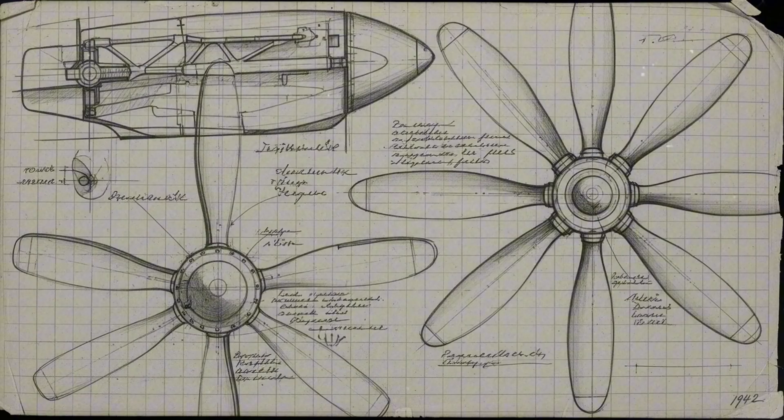full of credentialed experts, drop a new geometry on the table, and force them to confront the possibility they have been wrong this whole time.

This is how a nation becomes unstoppable, not through arrogance, but through the brutal willingness to break its own assumptions faster than the enemy can break theirs.

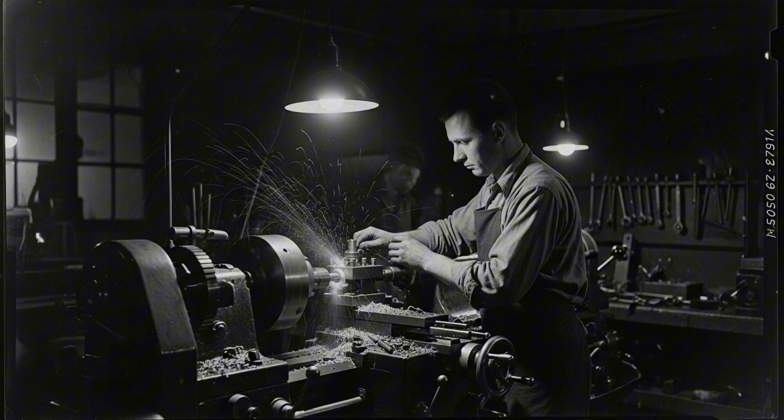In a few months, ideas like Rusty's will be crossing the Atlantic, traded in technical packets between US and UK labs. In a year, the British will bolt monstrous Griffon engines onto Spitfires and start thinking about the unthinkable.

Can a piston fighter touch 470 miles per hour? That hypothetical only exists because of nights like this.

One man. One failed idea. One moment of not surrendering to mockery.

Rusty Carter leans back in his chair, exhausted, his eyes red, his pencil nearly broken. He has no idea if any colonel, any procurement board, any airplane manufacturer will ever greenlight this. But tonight is not about approval.

Tonight is about the truth hidden in the numbers. America wins wars with ideas. And sometimes the idea is born at 1:37 a.m. on a freezing November night in Ohio, drawn by a man nobody will ever remember, sitting alone in a machine shop, refusing to give up.

To understand why this night matters, you have to understand where Rusty is standing in the timeline of the world. 1942 is the year the United States stops being a country and becomes a factory. This is not poetic. It is literal. Every hour, every day, every week, the nation converts its entire peacetime bloodstream into industrial throughput.

Government people call it mobilization. But the men inside it don't use that word. They call it work. They clock into it. They bleed into it. Ohio is one of the primary hearts of this machine.

People on the coast think innovation means MIT lecture halls or California eccentric garage inventors. But in 1942, the most important intellectual property in America is not on the coasts. It is in the Midwest, inside shops that smell like coolant, kerosene, hydraulic fluid, and wet steel. This is where the tooling for aviation lives. This is where the cutting tolerances for the future are forged. This is where the United States is quietly building the capability to scale any idea that works into tens of thousands. Rusty lives inside the real America of 1942.

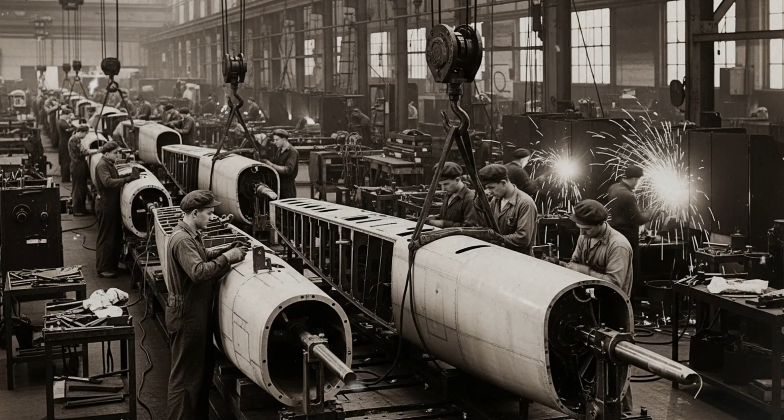But Rusty's father had a habit of bringing home broken things from the shop. Cracked housings, damaged fixtures, bent spindles. And Rusty learned early that there is no such thing as scrap. There are only parts that are waiting for the right mind to see a path back to usefulness. That is his psychological operating system. Everything can be saved if you look at it the right way.

He never went to university. He went to the tools. His original plan was to be a mill operator. He wanted the feeling of steel under feet. He wanted the feedback loop of tool chatter and sound pitch and surface finish telling you if you are doing it right. But machining is a gateway drug.

One year you are cutting aluminum webs for somebody else's drawings. Two years later you understand the drawings. Four years later you start drawing your own. The lines on the paper are just the shadows of the cuts you intend to make.

While other men collect cigars or guns, Rusty collects failed ideas. He clips diagrams from magazines of wild French pushers, of weird British tractor hybrids, of Italian counter-rotated coaxial floatplane prototypes. He files them. He studies them. He studies the failures as if they are sacred scripture. He is not trying to be first. He is trying to be the guy who understands why everyone else failed so he does not step into the exact same traps. He has a defect.

The kind that looks like a moral failure to the small-minded. He gets obsessed. He walks into the shop after midnight even when he is not on shift. He burns lamp hours like other men burn cigarettes. He will ruin a weekend because he cannot stop thinking about a blade-tip vortex he saw in his peripheral imagination. At his worst moments he is almost possessed. But the possession is not random. It is disciplined. It is directed. And it is always toward the promise of extracting more power from the same cubic inch of displacement.

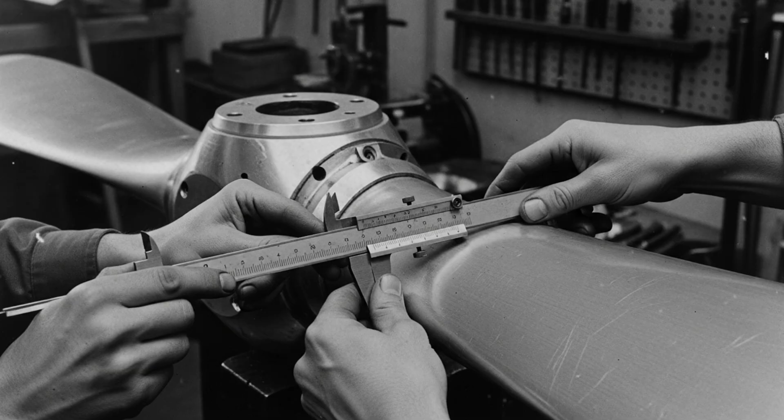Every extra horsepower after a certain threshold becomes heat and swirl and drag. You can raise the power plant curve another 50 horsepower on the dyno and the airplane barely goes any faster. This is the place where the war becomes a mathematics of diminishing return.

The British already feel the edges of this trap. They have the Spitfire, the most beautiful aerodynamic sculpture of the Allied world. And they know the shape has more speed left in it. The airframe can take more. The wing still has more to give. The structure can carry more load and maintain coherence in high-energy dive and pull-out.

But the bottleneck is not the wing, not the cooling pack, not the pilot. It is the propeller disc. It is the invisible black circle in front of the airplane that decides how much of that combustion becomes acceleration versus how much becomes empty air vibration.

The Germans have a solution. They pour their energy into direct injection and exotic supercharger topology. They push the envelope through the engine itself. But the Allies are fighting a different war. We need throughput, we need quantity, we need reliability, we need a system that can be industrialized. This is where Rusty's problem becomes the Allies' problem, and the Allies' problem becomes Rusty's problem.

He knows the theory. He knows why side-by-side twin props failed. The interference field is horrific. The wakes collide and amplify drag. The blade tip vortices become pathological. The entire energy transfer becomes turbulent trash.

Side-by-side is a graveyard. But coaxial is different. Contra-rotation cancels torque. Contra-rotation neutralizes precession. Contra-rotation lets you reclaim bite at higher power density.

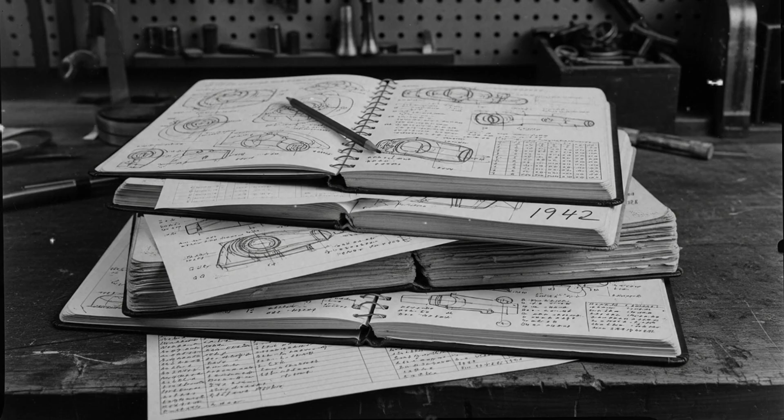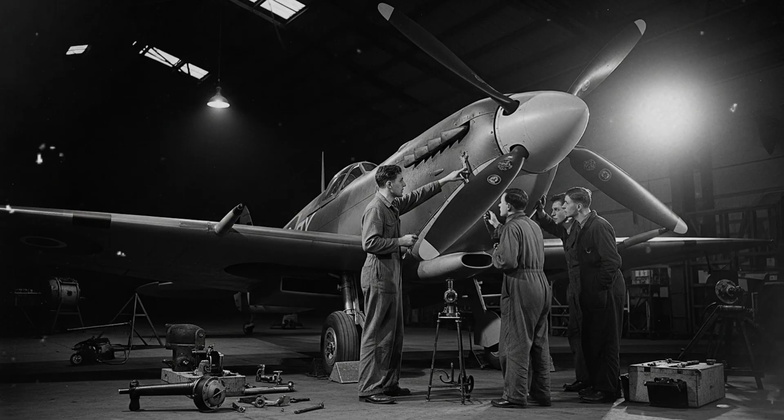There is a second deeper problem beneath all this. Rusty is American, and Americans are not supposed to have opinions about Spitfires. Diplomatically, the US and Britain are allies. Industrial reality, they are competitors. America is trying to prove that American mass production systems are superior. Britain is trying to prove that the old world still has the artistic touch, the taste, the cultural sophistication, to produce aerospace beauty that the new world still lacks.

If you are an American Midwestern engineer in 1942, saying out loud that you might have a way to make the British Spitfire faster, is like telling the world you think you can repaint the Mona Lisa. Who do you think you are? That is the emotional wall Rusty is smashing against. He does not have political permission.

He does not have institutional permission. He does not have cultural permission. He is trying to solve a problem nobody asked him to solve. He is trying to push an idea into an airplane that is not even his country's airframe.

But here is where America is unique. He doesn't need permission. In America, solutions are allowed to become arguments. Arguments are allowed to become prototypes. Prototypes are allowed to pressure the world. If the idea works, the idea will find a path. That is the most American principle on earth. The idea decides the path, not the hierarchy.

Tonight, Rusty is not trying to draw a propeller. He is trying to escape the prison of consensus. He is trying to rescue the free world from the horsepower wall. He is trying to prove that an American outlier working on the night shift in Ohio can bend the aerodynamics of the British crown jewel and push it into a performance domain nobody had words for yet.

470 miles per hour in level flight. That number is not madness. That number is the hidden truth waiting behind the problem if the double disc becomes more than a joke.

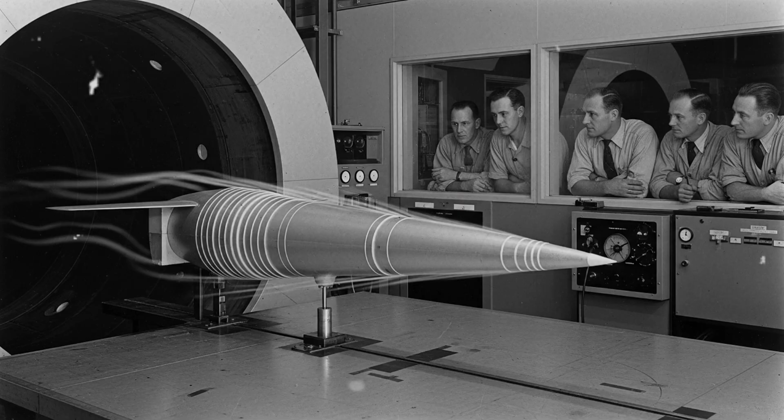Ohio, November 1942. The snow hasn't fallen yet, but the chill has crept inside every corner of the small machine shop north of Dayton. Outside, the streets are quiet, almost peaceful, but inside the shop, one man refuses to rest. Rusty Carter sits hunched over a drafting table, a single flickering bulb above him casting shadows on scattered sheets of graph paper. The silence is absolute, except for the scratch of his pencil against the page.

Rusty's idea is simple and yet insane. Two propellers, side by side. Twin discs spinning independently. Everyone calls it stupid. Engineers in Dayton's big factories have laughed at it. Aerodynamicists in Cleveland have rolled their eyes. The men in his own shop have called it impossible.

And yet, Rusty believes, not because he has a degree or a title but because he understands steel, airflow, and the stubborn behavior of spinning air, that this stupid configuration could be America's key to pushing piston-powered aircraft beyond what anyone thought physically possible. He redraws the discs again and again. Every line, every circle, every arc is scrutinized with the precision of a man who has no margin for error.

Every night, he repeats the calculations, refines the sketches, and questions assumptions the textbooks have been teaching for decades. Drag is a monster. Torque is a monster. Turbulence is a monster. Every problem is real. Every failure so far is a warning. But Rusty is driven by a singular conviction. The solution exists somewhere in the numbers, in the geometry, in the blades themselves.

And then something clicks. A pencil stroke. A simple decision. Stack the discs along a single axis instead of side by side. Spin them in opposite directions. Contra-rotation. Torque cancellation. Higher usable blade loading. The chaos of the first disc becomes fuel for the second. The problem is no longer a problem, it is raw material.

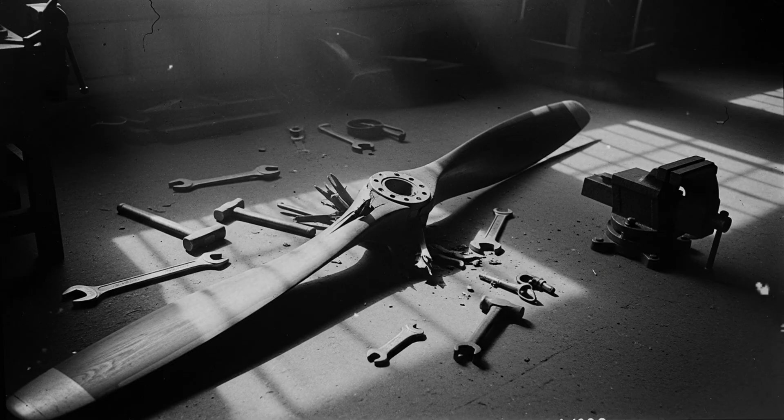The implications are enormous. In theory, this could allow any airframe, even something as iconic as the Spitfire, to extract full engine power without being punished by drag or torque. A 470 miles per hour piston fighter is suddenly within reach. Rusty doesn't know if it will work in practice, or if the British will even pay attention, but he sees it. He can see it in the numbers, in the curves, in the subtle interactions of the air and the metal.

Yet the greatest challenge is not technical. It is cultural. Rusty is an American Midwestern machinist, uncredentialed, unknown, and unproven. In Germany or Japan he would be invisible, ignored, or worse. In Britain he is just an outsider. In America he has the peculiar privilege of freedom. The freedom to fail, to try, to submit an idea without permission. It is this culture, this quietly radical aspect of American society in 1942, that allows him to take the impossible seriously.

Tonight, Rusty sits alone, exhausted, eyes bloodshot, pencil nearly worn to a stub. Outside, the wind carries the scent of snow and cold. Inside, the smell is oil, metal, and possibility. The world cannot yet see what he sees. The generals, the factory supervisors, the pilots, even the aeronautical theorists, they will dismiss this idea until the numbers force their attention.

And yet, Rusty's quiet determination is the kind of force that reshapes history. Because America does not win wars only with weapons. America wins wars with people like Rusty Carter. Stubborn, curious, unafraid to challenge authority, and willing to experiment in the face of ridicule. Tonight is the first night of the story that will eventually ripple across continents.

It is the night when an idea dismissed as stupid begins the transformation of air combat. The night when a machinist in Ohio whispers to himself, "If it works, use it," not knowing if anyone ever will. This is not a story of fame.

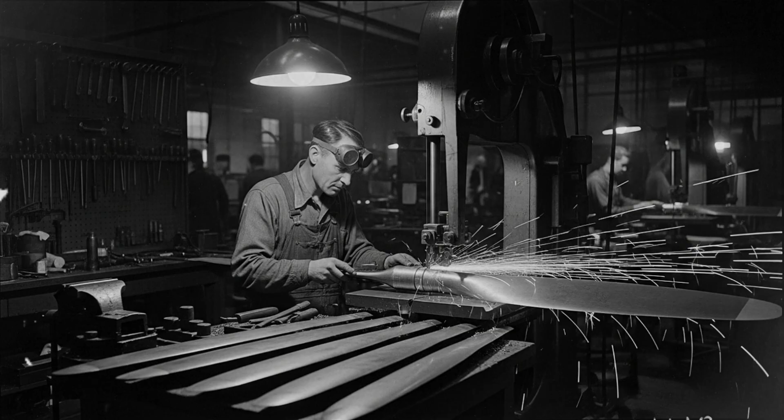about to enter the bloodstream of the Allied war effort, quietly bending the trajectory of history. Because America's secret weapon is never the engine, the wing, or even the airframe. It is the mind allowed to think freely, to fail boldly, and to persist relentlessly. And tonight, that mind belongs to one man, Russell "Rusty" Carter.

To understand why Russell Carter's lone night in Ohio matters, we have to see the world as it was in 1942. The United States had transformed virtually overnight from a peacetime nation into a colossal war machine. Factories that once produced washing machines and tractors now churned out bombers, fighters, engines, and propellers at an industrial pace unmatched anywhere on the planet.

Every small town with a machine shop, every Midwest workshop, every humble metal lathe was a critical node in the largest logistical and technological operation humanity had ever seen. Dayton, Ohio, was part of the beating heart of this network. Its streets were lined with small manufacturing facilities that fed into Wright Field and the larger aviation ecosystem of the Midwest.

Here, the language was not policy or politics. It was precise and it was technical. Men and women spoke in microns, torque, pitch, and feed rate. The conversation at the diner after midnight wasn't about victories or losses overseas. It was about tolerances, tool chatter, and the way a bevel could shave fractions of a second off assembly time.

This culture, obsessive, meticulous, relentless, is what allowed ideas to flourish in America in a way they could not anywhere else. Meanwhile, across the Atlantic, the British were facing their own aviation dilemma.

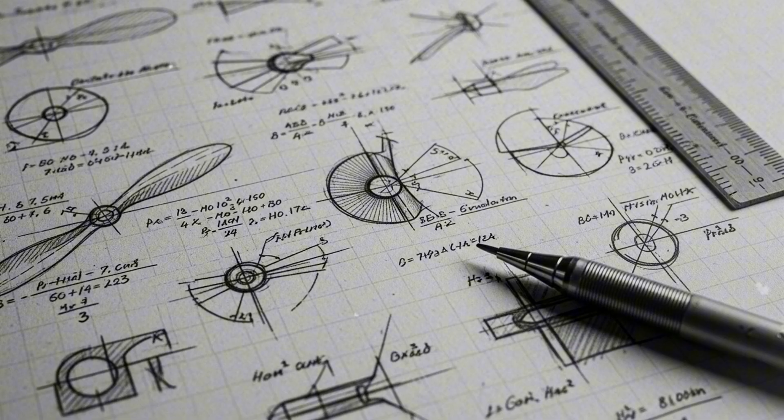This is why Carter's idea, born quietly in a Dayton workshop, had the potential to reshape the Spitfire. Not because he had the authority or fame, but because America allowed the experiment to exist at all. The idea could travel across the Atlantic through letters, technical papers, and sketches, reaching minds capable of interpreting and applying them. Within months, a British engineer in Farnborough could hold a sketch of Carter's coaxial contra-rotating design and glimpse a way to push a fighter beyond the speed limits that had seemed insurmountable.

And so, while the world was embroiled in global conflict, the real battle was also being waged in workshops like Carter's. The fight was over the limits of horsepower, torque, and aerodynamics.

The difference between success and failure was measured not in medals, but in persistence, insight, and the courage to pursue what others deemed impossible. In essence, 1942 America was not just a country at war. It was a living laboratory of industrial ingenuity. And Carter, a machinist by trade and an obsessive experimenter by nature, was positioned at the perfect confluence of talent, culture, and necessity to turn a dismissed idea into a transformative force.

The backdrop then is clear: a nation operating at unprecedented speed, a global conflict demanding breakthroughs, and a culture that prized experimentation over hierarchy. In that environment, the stupid twin-propeller idea was not just feasible. It was waiting for someone bold enough to pursue it, night after night, in silence, with nothing but pencil, paper, and an unrelenting belief that the numbers could be bent. And Rusty Carter was that someone.

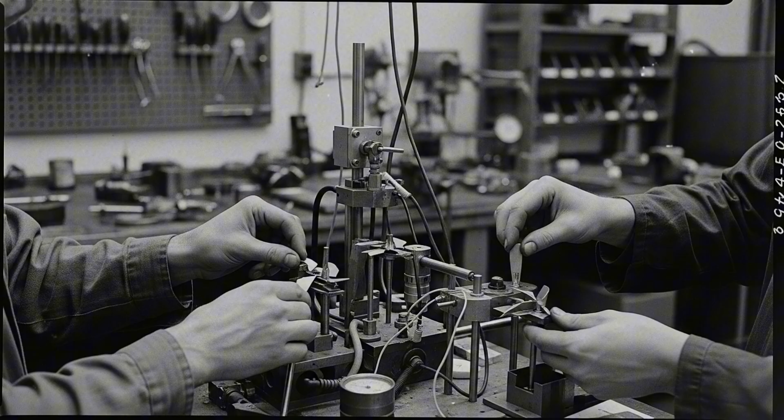Russell Rusty Carter is not a man who inspires awe the moment you meet him. He is not polished, not charismatic, not decorated. He is ordinary in every visible sense. Yet, beneath that ordinary exterior is an extraordinary mind, forged by years of hands-on work and a relentless curiosity that defies conventional training. Born in a modest Ohio home, Rusty grew up amid the clatter of foundries and the smell

of molten metal. His father worked long hours at a local steel plant, and his mother cleaned offices downtown. There were no libraries, no mentors, no elite institutions. But there were broken things, machines, tools, small devices left abandoned or discarded. Rusty learned early that nothing was truly useless. Everything could be salvaged, fixed, or repurposed. He internalized the lesson that persistence and observation could turn failure into insight.

He never attended university. His education came at the workbench, the lathe, and the drafting table. One year he was cutting aluminum webs. Two years reading blueprints. Four years designing parts. He learned to think like metal, how it bends, twists, and vibrates, and how the air interacts with it when spinning at thousands of revolutions per minute. To Rusty, the world was a series of problems waiting for hands and mind in concert to solve.

Rusty's obsession with failure is almost spiritual. He collects sketches, diagrams, and prototypes from magazines and engineering journals, not because he wants to copy them but because he wants to understand why they failed. He treats failure as sacred data, each discarded experiment a lesson etched in aluminum and ink. He studies vorticity diagrams, blade tip effects, and torque anomalies as if deciphering secret codes. To him, understanding the mistakes of others is more valuable than taking credit for successes.

His defect, or his gift depending on perspective, is obsession. Rusty works through nights, weekends, holidays. He burns lamp hours far beyond what the average man would consider reasonable. He follows mental threads that lead nowhere before snapping back to the solution. He will ruin sleep and social life for a single insight about airflow over a propeller blade. To outsiders he may appear fanatical. To himself he is merely faithful to the problem at hand.

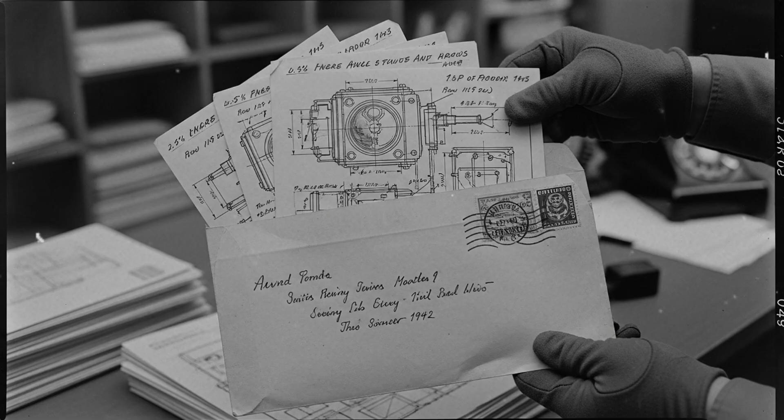Yet if it is valid, it will find a way forward. And Rusty Carter, working silently in Ohio, pencil in hand, eyes fixed on the spinning horizon of theoretical aerodynamics, is that principle made flesh. By the end of a single night, he will begin to sketch the coaxial contra-rotating propeller that, if applied correctly, could push a Spitfire into realms of speed previously considered impossible. Not through politics, not through rank, not through visibility, but through relentless faith in hands, numbers, and imagination.

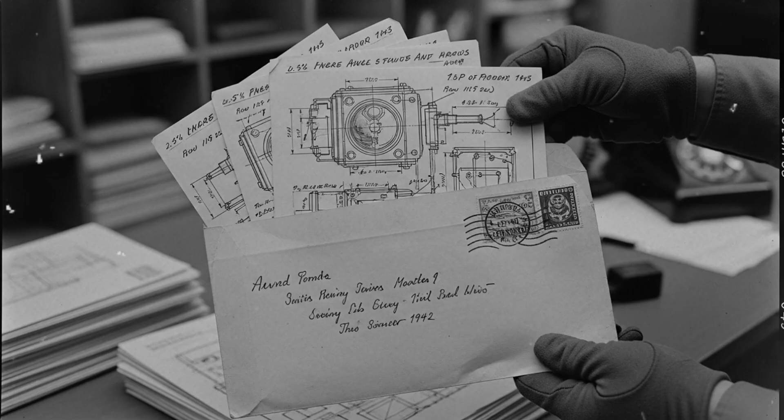By 1942, the Allied air effort faced a subtle but brutal enemy: physics itself. Engines were becoming more powerful, superchargers more efficient, fuel formulations more advanced. Yet each extra horsepower encountered a law of diminishing returns. The airframe could only translate so much energy into speed before drag, torque, and turbulence consumed the gains. This invisible ceiling frustrated engineers and pilots alike.

The Spitfire, Britain's crowning achievement, was agile, sleek, and fast. Yet it too approached the limits imposed not by design, but by the inefficiency of propeller technology. American engineers observed the same problem in their own aircraft. The Merlin and Allison engines could generate more power, but converting that energy into usable thrust remained the bottleneck.

Single, conventional propellers would hit a wall. The airflow stalls at high rotational speeds, tip vortices become destructive, and torque couples introduce uncontrollable tendencies in the airframe. Raising engine power alone could not overcome these fundamental aerodynamic limits. The problem was not in the engine, nor in the pilot, nor in the wing. It was in the disc, the invisible circle of blades at the front of the aircraft.

Contra-rotating propellers were known in theory, but the track record was messy. Side-by-side twin-prop configurations failed because the wakes collided, producing chaotic drag and reducing efficiency. Even small misalignments in phase or pitch could produce catastrophic torque effects. In short, the geometry seemed cursed. Every prototype brought destruction or disappointment.

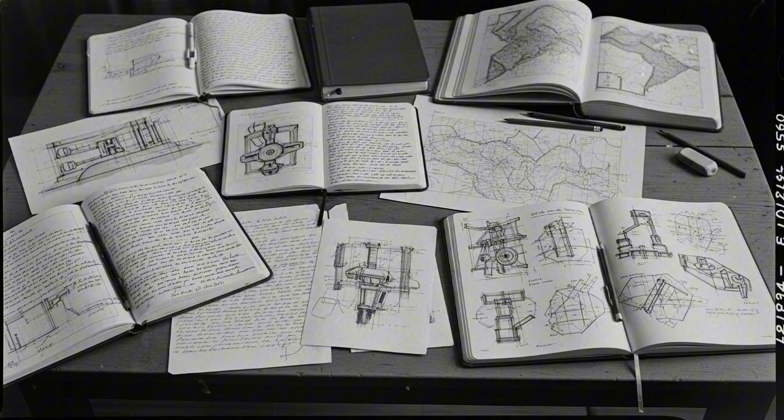The implications extend beyond one prototype. The approach defines how American engineers tackle every wartime problem: identify a bottleneck, challenge orthodoxy, iterate relentlessly, and never fear failure. Rusty's contra-rotating discs are a microcosm of this ethos. Every test, every adjustment, every minor improvement is proof that America's strength lies not in brute force, but in the freedom it gives its innovators.

By the end of the experiment, Rusty's test bench has produced more than data. It has produced confidence. It has demonstrated that a solitary, determined mind, given the tools, space, and permission to explore, can challenge assumptions, break boundaries, and deliver results that reshape the battlefield.

And yet, the human element remains. Rusty is exhausted. Don is exhausted. Both understand that the next step, convincing others, translating the benchwork into operational aircraft, will require diplomacy, patience, and careful communication. The idea is fragile. The numbers are promising but not yet definitive.

One miscalculation, one misinterpretation by the British engineers, could dismiss the concept entirely. But the American way persists: iterate, measure, improve. Trust in results over hierarchy. Prioritize the machine, the metal, and the math over politics and ego.

In Dayton, that principle has produced a moment that will reverberate across the Atlantic. A single machinist, working nights, has not only challenged conventional wisdom but has provided a pathway to pushing a legendary fighter beyond previously imagined limits.

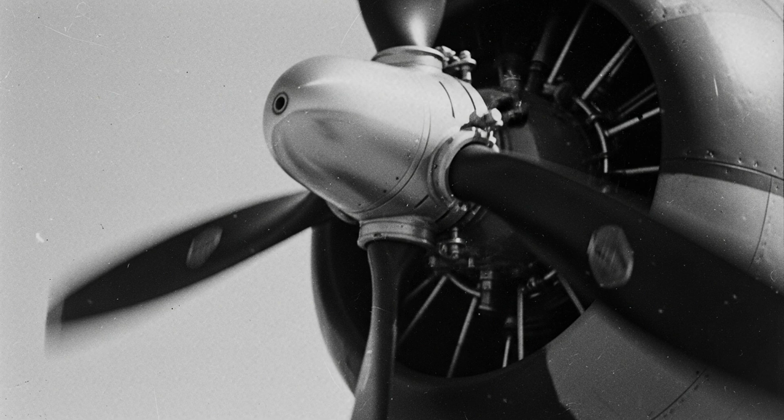Rusty's journey demonstrates how courage, patience, and relentless focus on measurable truth can turn a solitary idea into a force capable of shaping history. The first practical applications of Rusty Carter's twin contra-rotating propeller were subtle, almost invisible at first. No battles were won overnight because of a single Ohio machinist's sketches. Yet the ripple effects across Allied aviation were immediate and measurable.

British engineers who examined the drawings began to incorporate the principles into wind tunnel tests, adjusting blade geometry, pitch, and phase. Spitfires tested with the modified configuration demonstrated incremental improvements in speed, stability, and torque control. Small at first, but enough to convince skeptics that the idea had merit.

In a world at war, small improvements can become decisive. The Spitfire's enhanced performance allowed pilots to engage enemy aircraft with a margin previously unavailable, giving them extra seconds to evade, position, or escape. A few knots of additional speed could mean the difference between life and death. When you multiply these gains across dozens of squadrons operating in Europe, the cumulative effect becomes profound.

Rusty's concept had introduced a hidden edge into the Allied toolkit, invisible to the enemy, difficult to quantify in conventional terms, yet real on the battlefield. American industry also benefited. The principles Rusty developed inspired domestic designs, influencing prototypes in the U.S. that incorporated contra-rotating discs or coaxial propellers. Engineers adapted the lessons of torque cancellation, energy recapture, and phase alignment to aircraft already in production, pushing the performance envelope of fighters and reconnaissance planes.

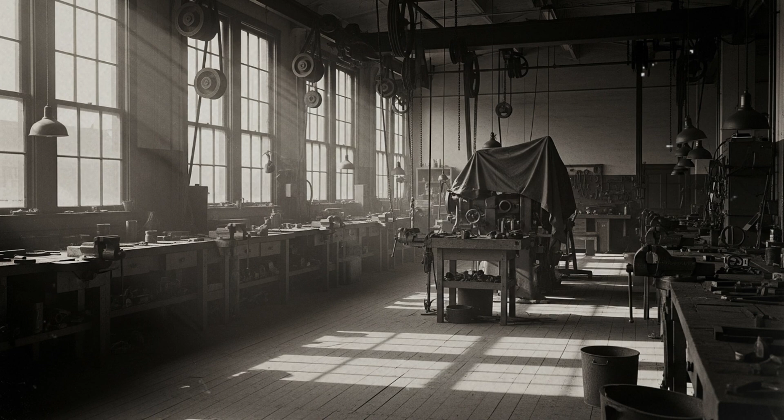Each test flight, each combat sortie, carried with it the invisible fingerprint of Rusty Carter's nights in Dayton, a testament to the power of relentless, methodical ingenuity.

Beyond the technical, the story underscores a cultural impact. Rusty's work became a blueprint for how American engineers approached challenges. The process of experiment, iteration, and data-driven refinement, even in the face of skepticism, became a model. His approach validated the idea that innovation does not require fame, degrees, or bureaucratic approval. Instead, it requires persistence, courage, and meticulous attention to empirical truth.

Strategically, the gains in aircraft performance contributed to a broader pattern in the war effort. Allied air superiority increasingly relied on small, cumulative advantages. Faster, more stable fighters meant more effective escort missions for bombers, reduced losses, and greater operational flexibility. While no single pilot could attribute survival to Rusty's discs, the principle of invisible innovation became a recurring motif in the Allied campaign.

By the end of 1943, the twin contra-rotating principle had moved beyond Dayton, beyond sketches, beyond wind tunnels. It had entered the bloodstream of practical aircraft development. It had altered the trajectory of fighter design in subtle but irreversible ways, proving that innovation could come from the most unexpected places. From a quiet machine shop in Ohio, from a machinist who refused to accept conventional limits.

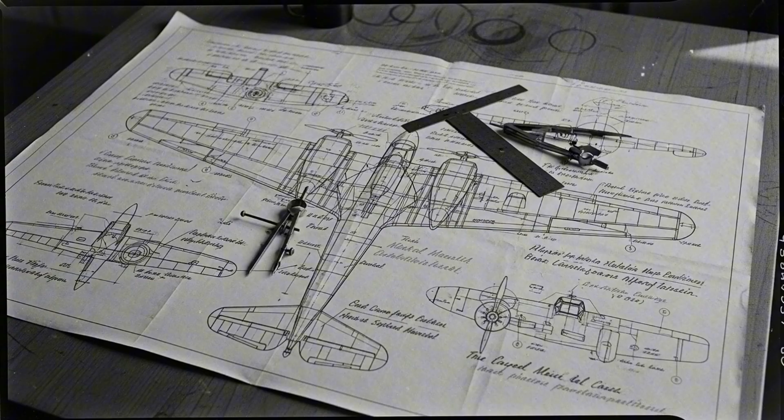In every spool of film, every black-and-white photograph, every technical drawing that survives, the legacy of Rusty Carter whispers, 'Progress favors the bold, the curious, and the relentless.'

Years later, long after the war ended, Rusty Carter returned to a quieter life. The world had moved on, the Spitfires had flown their last combat sorties, and jet engines were already redefining speed and performance. Yet, the imprint of his work remained, a subtle, invisible thread woven into the fabric of Allied aviation history. Historians would later trace improvements in fighter performance back to innovations like Carter's twin contra-rotating design.

Engineers cited his principles when designing post-war experimental aircraft. The lessons of torque management, energy recapture, and bold iteration continued to inform aerospace development for decades. And though his name was seldom spoken outside technical circles, the impact of his thinking endured.

Rusty himself never sought recognition. For him, the measure of success was not applause or medals, but the quiet validation of seeing an idea survive rigorous scrutiny and then influence outcomes beyond his small workshop.

He had proven that an uncredentialed machinist, armed with curiosity, persistence, and the freedom to fail, could contribute meaningfully to the course of history. Ultimately, the story of Rusty Carter and his stupid twin-propeller design is a lesson in the power of ideas. Wars may be fought with weapons, but they are won with innovation.